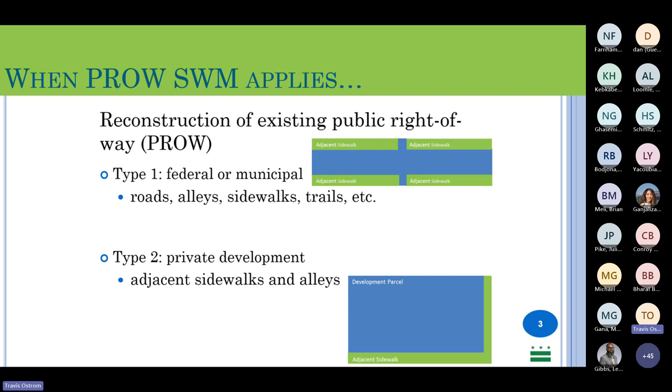And we'll get into the differences and how those are handled in depth later on in the presentation.

So there are a few cases where the public right-of-way stormwater management regulations do not apply, some exemptions to this application. One is when there is a major regulated project that does not disturb the adjacent public right-of-way. Right, so just because you're developing a private parcel, you don't always disturb the adjacent public right-of-way. Sometimes your disturbance is limited to these activities that are mentioned here. So just trenching for utility work, right? So if you're not really redeveloping the public right-of-way, you just have to put in a trench for the utilities.

Stormwater management regulations don't apply to that. Aprons, so driveway aprons are also another case, or minor disturbance, which I believe is less than 50 square feet. But there's very little disturbance happening in the public right-of-way. So these cases, you don't have to do a full stormwater management plan for the public right-of-way. It's just what you're doing on your private parcel.

And then there's the case of voluntary retrofits of the existing public right-of-way. So this is where you'll be voluntarily retrofitting the public right-of-way to achieve better stormwater management. So putting in a bioretention in the public right-of-way, putting in a permeable pavement in the public right-of-way. These types of projects, when it's voluntary, just the intention of the project is the BMP itself, then the public right-of-way maximum extent practicable process that we're talking about today doesn't apply. There are still some regulations around that, some design specifications that you have to follow, but this process that we're going to talk about in depth today doesn't apply to those voluntary projects.

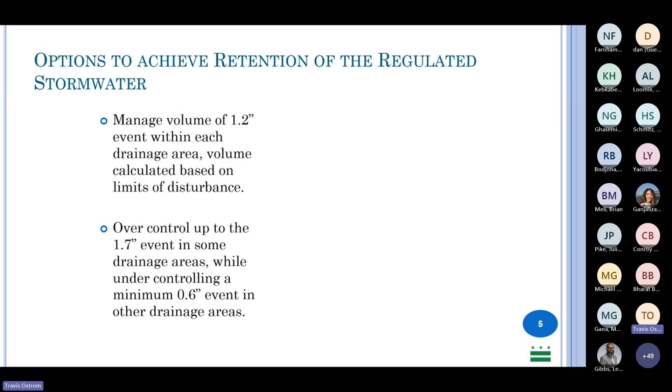You can also manage the minimum of the 0.6 inch event within each drainage area and then balance the rest through offsite retention. This is rarely used because it's not required, really, right? So you're doing the maximum extent practicable process in lieu of paying for some offsite retention volume. I don't think I've ever seen anybody do this, but it's an option. If you want to pay for those offsite retention volume credits, you absolutely can. And so this last one is really the bulk of what we see in the public right-of-way.

And it's to establish a technical basis to demonstrate that stormwater management has been met to the maximum extent practicable, or the MEP. So that's what we're talking about today, is really doing everything that you can in the public right-of-way, considering the conflicts and whatever else is going on that you have to work around, to get us close to that full volume that started with the first bullet point there.

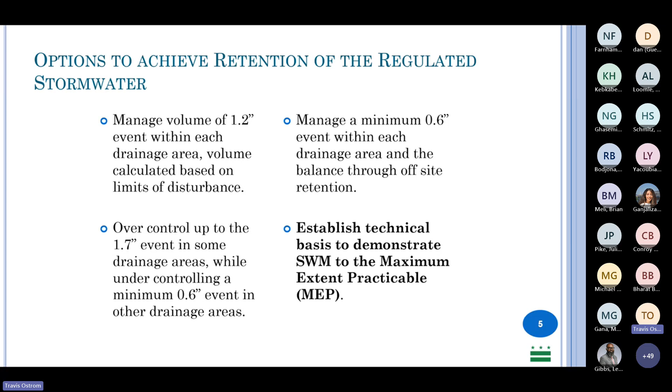And that's really kind of the most common thing. But it's important to remember that the target is always the full retention volume. So don't undersell yourself. There are opportunities to do stormwater management in the public right-of-way. Please keep that as a focus throughout this, because we're going to look at a lot of different conflicts and reasons why it's difficult to do stormwater management in the public right-of-way. But it's good to keep in mind that we are trying to keep that goal, that maximum extent, in mind.

So that said, really the maximum extent practicable, or the MEP process, is a recognition that it's technically infeasible in many cases to achieve that full regulated retention volume, right? So you go through this process and you demonstrate how you've done the stormwater management to the MEP. And as I mentioned from that third bullet point, it's excluded from the requirement to use offsite retention. So you don't actually have to. You're absolutely welcome to purchase offsite retention credits through the SRC trading program, but you're not required to.

Sorry, I lost my slide.

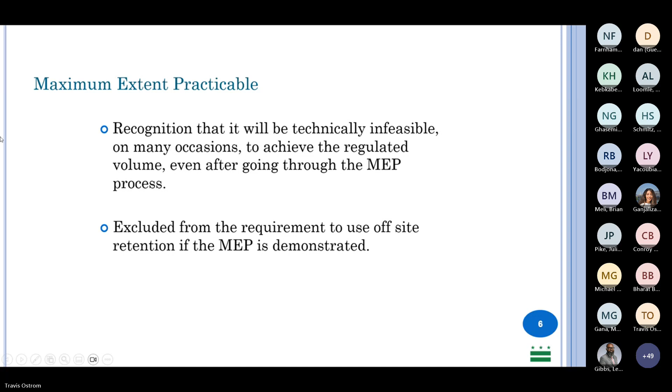So talking about some of the constraints in the public right-of-way, there are unique site constraints for each site. Each site's a little bit different, but generally we have, in many cases, some of the same conflicts. One is that there's limited space outside of the roadway, right? So the main part of the public right-of-way in most cases is the roadway itself. So working around that area, sort of between the roadway and the private parcels, restricts a bit of the opportunity for stormwater retention.

Often, especially for these type 2 projects where it's really disturbance of the public right-of-way ancillary to the primary goal of the project, which is the private parcel, you're really not going to be modifying the roadway, right? Some of those roadway reconstruction, the type 1 projects, possibly can do some more modifications to the roadway, but in general, the roadway is the roadway. So you're kind of working around that as a major constraint. And then there's the traffic loads again, so the roadway kind of takes primacy as the primary use of that space in most cases.

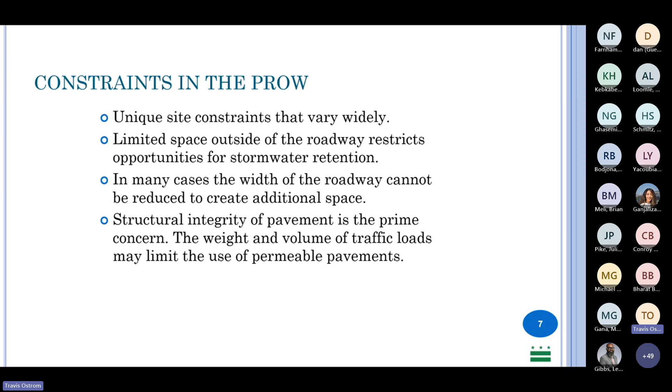So one point that I want to really emphasize here is that these regulations are driven by the Department of Energy and Environment, the DOEE standards. And so we have this Stormwater Management Guidebook, last updated in January 2020. This is available on the DOEE website. I highly recommend everyone, if you haven't, read through this and get familiar. And that other training, I think someone posted it in the chat, the link to the other trainings on YouTube for the compliance, goes over a lot more in detail on the Stormwater Management Guidebook. But that's a really good thing to remember here, is that we're talking about public right-of-way. It's sort of a specific instance of the stormwater management that's covered in the Stormwater Management Guidebook.

And we're going to go talk about the BMPs, or talk about this public right-of-way MEP process. And it ends up kind of focusing on 3 primary BMPs, not exclusively, but just because of the constraints, these end up being the 3 most common. We have permeable pavement opportunities. Bioretention is a really big one, because you can fit a bioretention in a relatively small space to get a relatively large treatment volume or drainage area. It kind of gives you a lot of bang for your buck when you're talking about this constrained real estate of the public right-of-way. And then tree planting and preservation, this is a huge opportunity. DC has some very ambitious goals on preserving and increasing the canopy cover of trees throughout the city. So it's really important to recognize that BMP as one that can be taken advantage of in this MEP process.

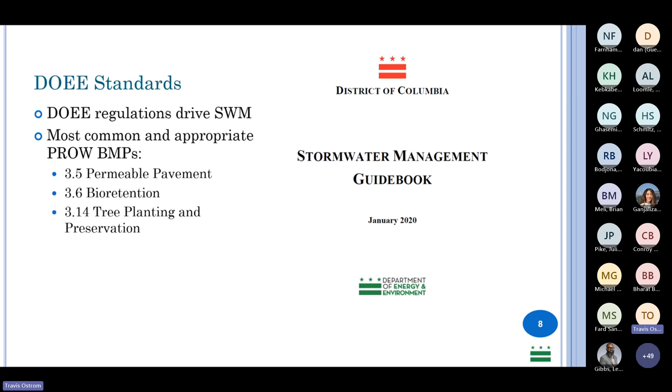So you've got that bioretention function there, and then you also have the tree. The tree is in the bioretention area, so it can be an additional BMP on top of the bioretention. When you're doing your calculations for retention, you get credit for the bioretention itself, and you get credit for a tree that you're planting. The tree has all sorts of functions - it's got the canopy, the interception of stormwater, as well as the co-benefits you get from both bioretention and trees in terms of the urban environment, ecological benefits, heat island, and the other benefits of putting these plants in these areas.

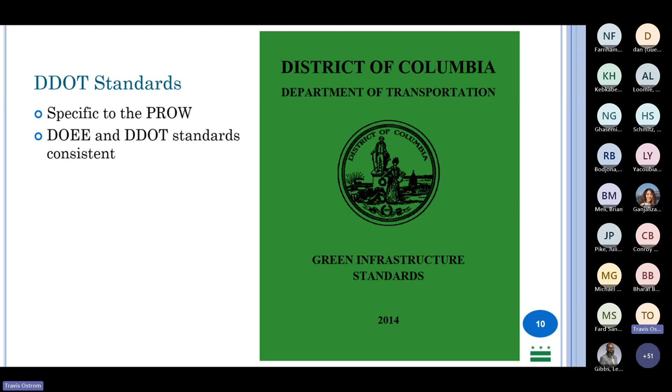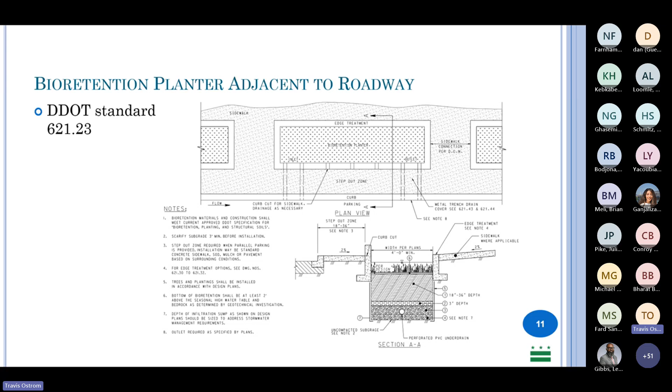Going into this public right-of-way maximum extent practicable philosophy and policy, the basic principles start from maximizing BMP placement. We want to use as much of the space available to put BMPs in as possible.

We also want to maximize the BMP sizing, where it makes sense, getting as much retention of that drainage area as possible. I don't mean putting in a gigantic bioretention that only has a tiny amount of area draining to it, that's not useful and effective. I mean maximizing the BMP sizing relative to its drainage area, getting as much stormwater treatment as you can.

Minimizing impervious widths is an important point that's often overlooked. We want to not just put in BMPs, but also see what we can do to minimize how much imperviousness is in the public right-of-way. Are there areas where you can remove existing pavement, maybe extend the tree rootable area that's there? Are there other places where, instead of an impermeable surface, you can change it to a permeable surface? And then managing the commingled stormwater runoff.

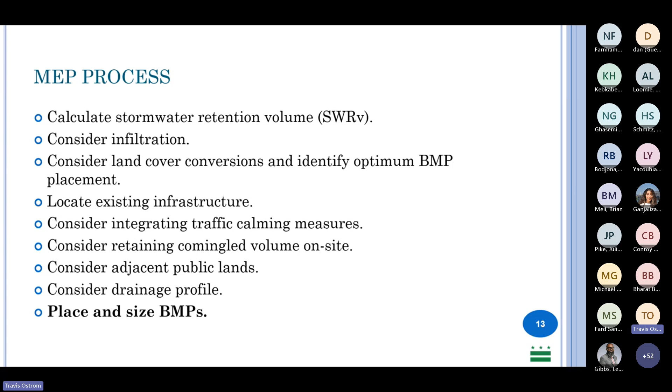So the MEP process is a process for design, but it's also a process that you have to demonstrate. You have to demonstrate to the plan reviewer that you've gone through this process and document the steps in the process that you've done.

You want to demonstrate that you've evaluated the infiltration capacity, looking at the water table elevations for any opportunities - if you don't have water table issues, or if you do have restrictions based on high water table. Looking at the infiltration feasibility.

You have to do geotech testing, looking at whether there's a possibility to amend soils, whether under-drains may be needed, and looking at any soil contamination that may be present in the area. These are just things you need to look into when looking at the infiltration potential or limitation.

Looking at existing infrastructure - is there potential conflict with anything in the subsurface? In the public right-of-way especially, there's a lot of infrastructure in the subsurface. You have to identify the location and elevation of the existing storm drainage infrastructure and really all the utility infrastructure. If you're going to demonstrate that you've done the maximum extent practicable, you have to show where these utility conflicts are and that they actually are a conflict.

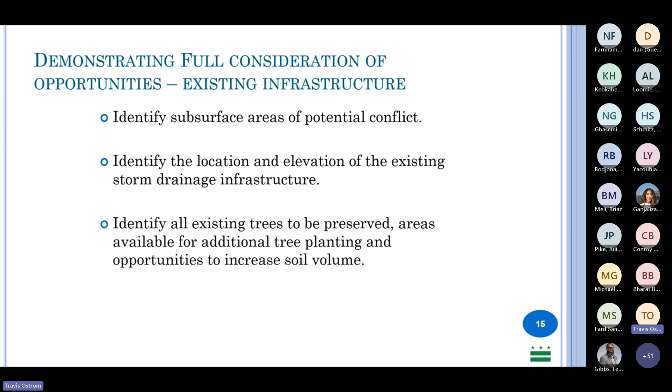So when you get into sizing the BMPs and placing the BMPs, you want to delineate the full drainage area to the BMP locations - not just the BMPs, not just the drainage area that's within your LOD, within your limits of disturbance. You want to look at the full drainage profile of all of the roadway runoff.

Maybe there's runoff coming from the private parcel that's getting to these BMPs, so you want to look at and delineate that full drainage area. Then follow the sizing and design methodology for whatever BMP it is, using the appropriate chapter of the stormwater management guidebook from DOEE and from DDOT. There are specific design and sizing methodologies in those documents that are very helpful.

And then you provide that to the plan review - provide the calculated sizing criteria for that BMP. And if you can't design the BMP exactly based on those criteria, there can be reasonable modifications to it given whatever constraints are there.

We want to right-size the BMP rather than oversizing the BMP. As I mentioned, having a gigantic bioretention that's not receiving a lot of runoff isn't really that helpful. It would be preferable to have a right-sized bioretention and some additional green space rather than having an oversized bioretention that's not going to be doing much because it's not receiving enough drainage area.

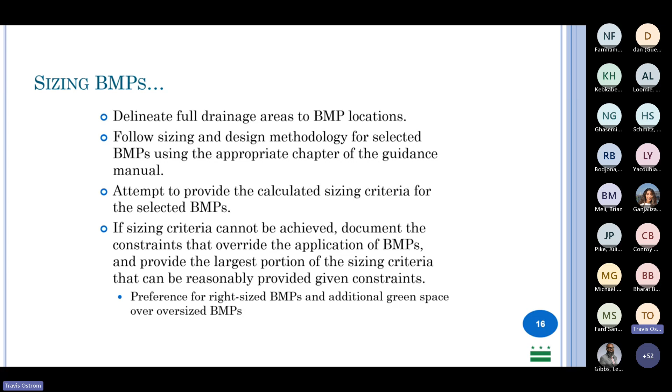So going into some of these conflicts in a little bit more detail, one of the most common conflicts we see is low infiltration rate.

As I mentioned, we're working in the public right-of-way where oftentimes the historical use of that area has been compacted roadway or sidewalk. You may not have the available spatial layout that you need for connecting to a storm sewer. Oftentimes you do, but sometimes you can't.

The topography, right? Oftentimes where you're working, where you could put in a BMP is not where the water is going, or where the water is going to go based on your design. So you can try to modify the design to some extent when you're reworking a whole roadway, but oftentimes the topography is sort of decided for you when you're working in the public right-of-way. You don't have, in many cases, the ability to modify that in the way you do if you're doing a full private parcel development or if you're doing a full roadway reconstruction.

And then the existing trees, as I mentioned, is another common physical conflict.

Beyond the actual physical conflicts, there are a number of other uses for the public right-of-way that we've alluded to throughout this, that there are all sorts of things going on in the public right-of-way, that it's not just a place to manage stormwater and get cars through. There are a lot of other requirements that we have to think about, right?

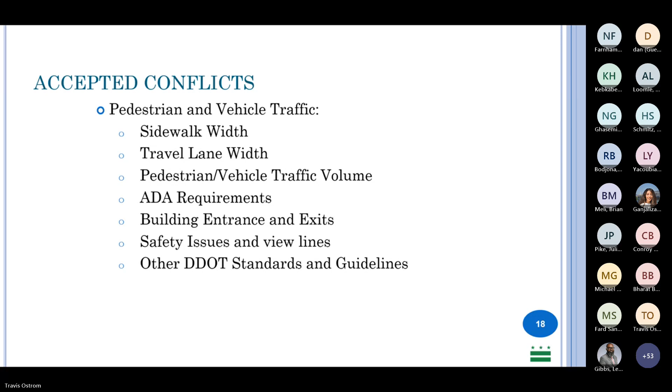Looking into just one example of the detail here for utilities. Utilities are one of the very common accepted conflicts, right? And when I say accepted, it's if you're demonstrating in this MEP process that you've considered, you're showing where on the plans, right? This is the sidewalk width that we have to maintain. These are where our utilities are placed, and this is the space, the spacing between where the BMP could go and where the utility is.

As I mentioned, just because there's a utility there doesn't mean you can't do a bioretention or another BMP. There are details in the DC Water Green Infrastructure Utility Protection Guidelines and other relevant agency standards that will determine whether you can put in BMP around those utilities. So it's just a thing to consider. You have to look into it and demonstrate where these potential conflicts are. But if there are conflicts, it's a justification for not putting the BMP in that location.

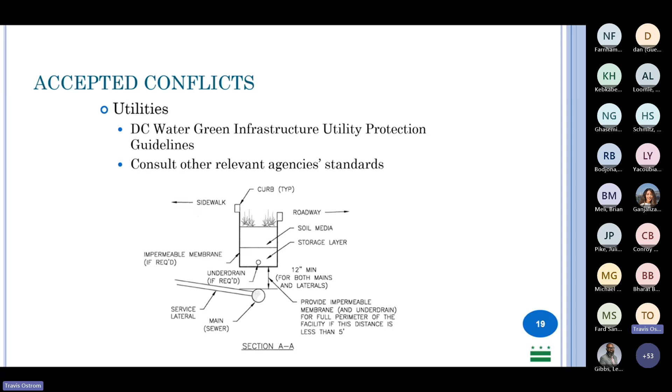So there's just more kind of details on the setbacks. I won't go into too much detail on that, but just to point out that the setbacks are important to consider.

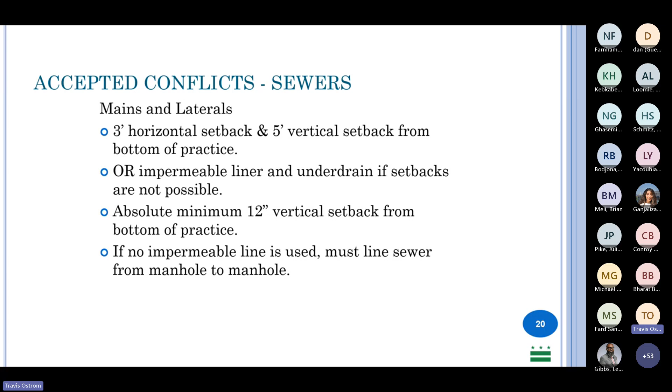So I've talked a bit more about the type 2 MEP projects so far. We're going to kind of go into a little bit more detail on that specifically. And it's a pretty straightforward approach, right? So you're looking at if the development meets the SWRv in the public right of way. So that stormwater retention volume, that kind of target, you're looking, did you hit the target? Did you put in enough

stormwater management features in the public right of way, right? Whether that be land conversion or a stormwater BMP to meet that full stormwater retention volume. And if not, has the designer maximized stormwater retention and provided a narrative, provided that documentation, that demonstration that the MEP has been followed, right?

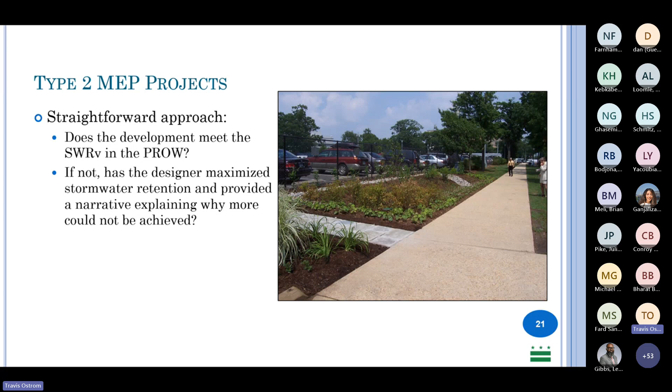That's a really key part of this, is that oftentimes, I know there are a lot of things when you're designing that you go through and there are constraints that you consider. You have to demonstrate those to the plan reviewer, and that'll help you avoid some of the back and forth of the plan reviewer asking, oh, did you consider this? And maybe you did, but you didn't demonstrate it. So keeping that in mind when you're putting together your designs to make sure that you're communicating this process to the plan reviewer.

So some of the common issues we see in these type 2 projects, the development parcel and adjacent public right of way, is that we see plans that just don't consider the public right of way at all. There's disturbance, but no attempt has been made to show any sort of stormwater management in the public right of way.

Another issue is unclear delineation of the public right-of-way limits of disturbance. Oftentimes we'll see plans where the on-site private parcel delineation is very clear, but the work going on in the public right-of-way is not clearly shown, so it's difficult to determine what area of disturbance we're talking about.

A narrative is very essential, explaining the MEP efforts. Weak justification is something we see often, so we really want plans and designs to show this process. The narrative should explain the efforts made to put in stormwater management to the maximum extent practicable, and you have to justify it, considering all the elements discussed.

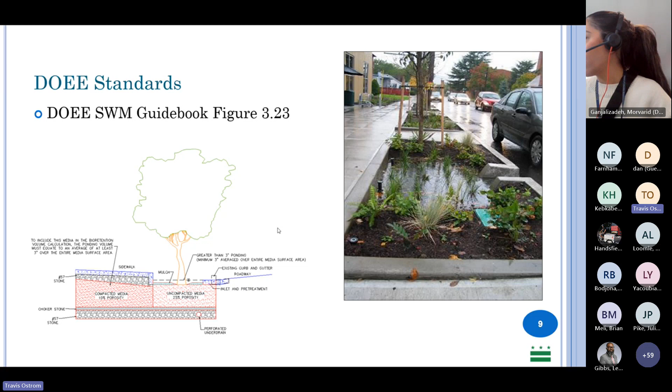Sorry, before that, Will also asked: in general, if you're replacing a portion of asphalt with sidewalk, like curb bump outs or bus platforms, I think these are minor disturbance. Can you confirm?

So the minor disturbance would really relate to how much area. Sidewalk, that's disturbance, it would be a matter of how much you're disturbing. So those, I guess I had to see, let's see the exemptions slide.

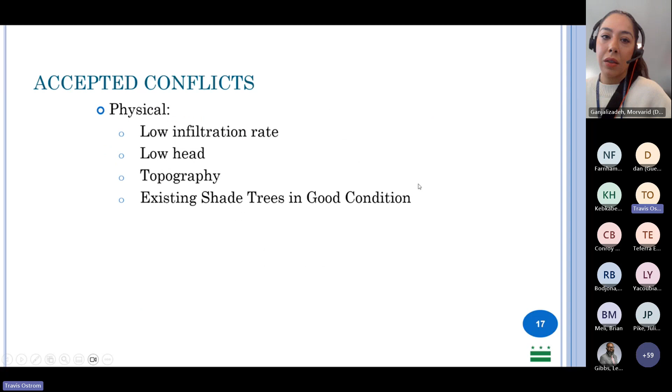Travis, I'll also jump in. This is Julie Pike, yeah good thing. Hello, I'm from DDOT Stormwater as well. It would not automatically just be considered minor disturbance, and we go over this a little bit more in the presentation that Morvarid has.

It's a little bit more specific in terms of what we're looking for. So if your disturbance for a curb bump out or bus platform or anything else still triggers that 5,000 square feet, you would still have to look around and see what you could incorporate. They're just not automatically exempt.

There is some construction with these bump outs and bus platforms in which a standard construction practice would not mean removing the GAB at the bottom, or removing existing pavement layers, and those would not be considered disturbance. But I don't want anyone to think we're encouraging you to leave substandard base in place just to avoid doing MEP. This would be based on actual standard constructability and construction practices, not an effort to skirt around doing proper stormwater management.

Thank you, Julie. That's a really important point to remember: throughout the DOEE guidebook, there are all sorts of exemptions and special situations, and none of those are really intended to say you don't have to do any stormwater management in general. It's really trying to recognize specific cases.

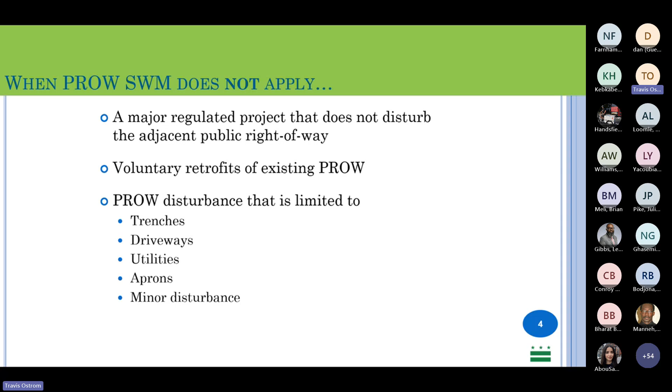All right, so let me continue on with the— Hey Travis, yeah go ahead. There was just one more item about trails.

We referred to section 2.13 for trails, so it can fall under the practicable process. I don't know if you want to dive into that, or if they are natural land cover—I think that's a big issue with trails. So, the trails is sort of a special case.

So that's another one of those situations where it's a kind of special situation. We're recognizing that there's possibly a trail that would have greater than the amount of disturbance that would trigger stormwater management requirements, but not in such a way that it makes sense to put in BMPs. And so 2.13.2 talks about the practicability process. That's a process where we really get into some of these special cases, like turf fields at schools or parks, trails, affordable housing, where we're sort of recognizing the realities of those situations.

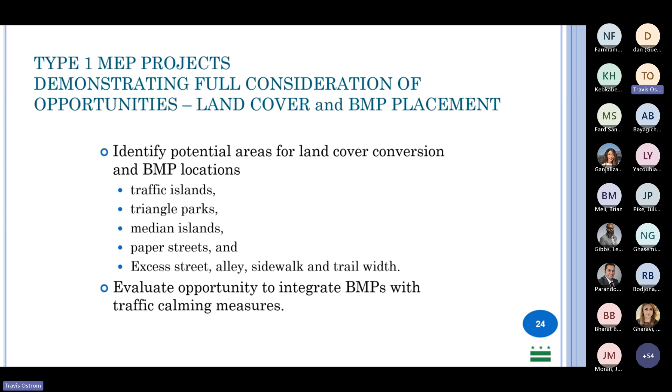And you want to really look at your project on the grand scale of it - identifying potential areas for land conversion and BMP location in and around the roadway. So traffic islands, triangle parks, median islands, paper streets, alleys, sidewalks - looking at these sort of opportunities to integrate BMPs with the other infrastructure and spaces available in the roadway. So maybe with traffic calming measures, in some of these median islands and that sort of thing, where you can use some of the space available for stormwater management.

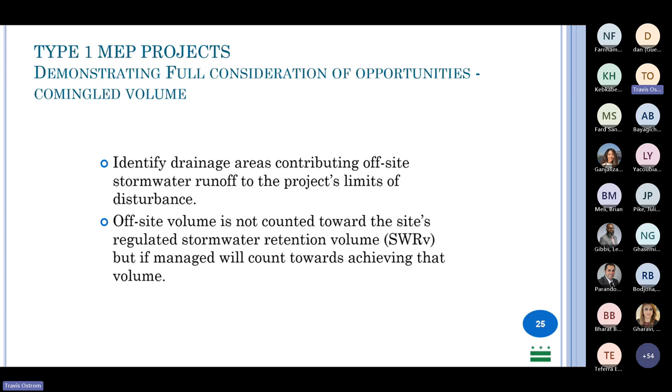And what you want to do is really demonstrate that you're giving full consideration to all these opportunities. You're focusing on commingling this stormwater runoff from the roadway and taking into account the full drainage areas. So just because you have certain limits of disturbance, there may be additional runoff coming from areas outside of that limits of disturbance - consider that runoff as potential to manage. It doesn't count towards that actual retention volume in the calculation, but if it is managed, it doesn't count towards the requirement, I should say. So when you're calculating the requirement, that target SWRv you're trying to achieve, that volume coming into your limits of disturbance doesn't count towards that. But if you manage it, it counts towards your credit - it counts towards your efforts to reach that SWRv. Hopefully I got that across.

So what you really want to do in these cases is look for opportunities for best management practices and land conversion. You want to try to keep the imperviousness as minimal as possible and select areas for the optimum opportunities. Where would you want to put the BMPs? Where would you want some permeable surfaces, landscaped areas, turf that's going to achieve some infiltration? Then select the most appropriate BMP types for these areas using the guidance manuals available.

If you can alter the drainage profile - this is one thing you might feel a bit constrained by the way the roadway is laid out - it gets at integrating stormwater management considerations into the project, so it's not always an afterthought. It's something that can be worked into the project design from the beginning, and that may open up opportunities by changing that drainage profile to allow for more runoff capture by the BMPs.

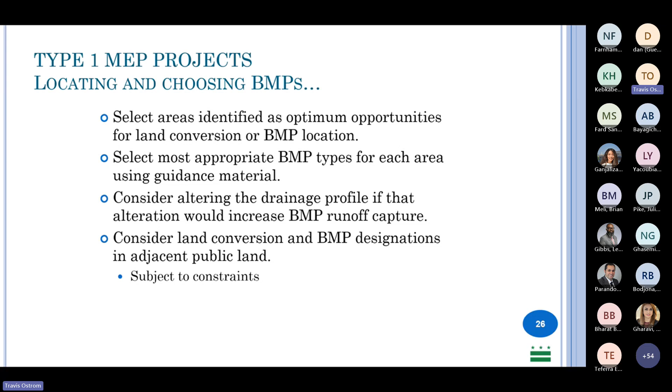And again, with land conversion - if you're considering stormwater management as an integral part of your project design, you can look at some of those opportunities. Maybe it's on adjacent public land, maybe it's not. As I mentioned, with adjacent public lands there are some additional constraints that may come along with that. But there's often opportunities for land conversion and BMP designations that you can figure out if you're really thinking of it as an integral part of your project.

So I'm going to walk through an example. The process here is a little bit different than the narrative documentation process we went over for the MEP Type 2. The Type 1 MEP has defined stages - you're going to be submitting your plans at the 30%, 65%, 90%, and 100% design stages. So we really have to stress that we want you to follow that process.

If you come with a 90% design, and at that point you're starting to evaluate the stormwater management opportunities, it's going to make the whole process a lot more difficult. You really want to start at the 30%, in your conceptual design. You really want to have stormwater management integrated into your design thinking. That's why we ask for the 30% submittal for the stormwater management plan - so you can have it integrated in and start thinking about these things.

And there are specific steps to it, so we'll go through a little example here. The first step: you're going to look at your drainage areas and your regulated volumes. What's your LOD? How much of the stormwater retention volume is calculated based off that LOD? And then delineate the drainage areas within that LOD and outside the LOD - where is the adjacent area flowing to as well?

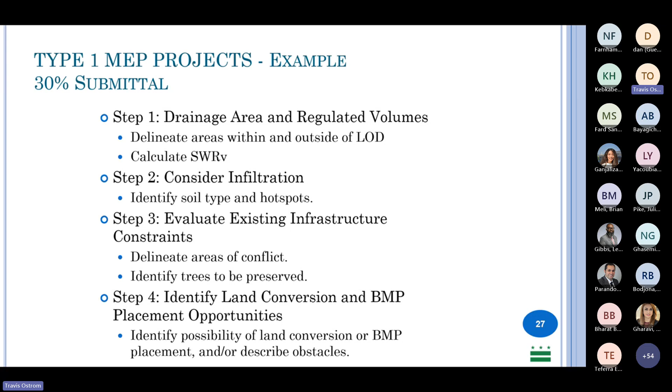So looking at and delineating these areas of potential conflict - utilities, existing street trees, that sort of thing. Step 4: identifying the land conversion and BMP placement opportunities. You can start thinking about where, in the scope of what you've got at the 30% stage, you can maybe do some land conversion, or potentially put some BMP without having looked into detail of all the other items you'll get into in later stages. But where could there be some potential? You want to start thinking about that at this stage and showing it.

All right, so there is the limits of disturbance. It's mostly the sidewalk area there. As I mentioned, the mill and overlay is not part of the regulated stormwater volume.

But the blue area here is all the drainage area. So as I mentioned, you have this drainage area that's within the LOD, that orange, and then you have the drainage area that's also flowing to it from the adjacent street. Some a little bit on the bottom here, some from just outside onto what might be the private parcel there—oh no, sorry, it's still in the right of way. But it might be flowing from another sidewalk area that's outside of the LOD.

As they've shown in this example, this delineation of the drainage area is not considering the private areas that may be flowing. That's not always the case. Maybe this is commercial buildings right up to the right of way and there's no runoff coming from them. But in many cases, there will be runoff coming from these private parcels, and that should be included in the blue drainage area if that's the case. So it's really dictated by the actual site conditions.

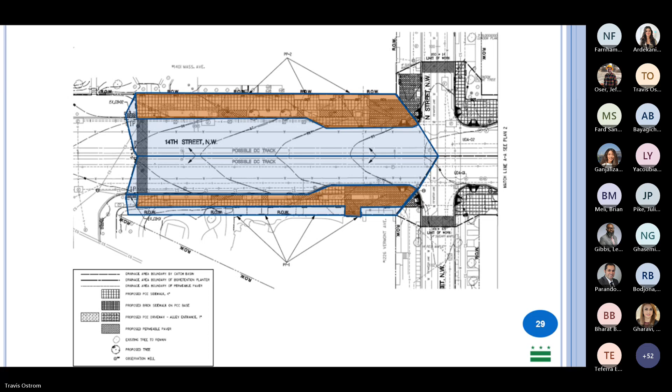And then also in the right of way, the existing—so this is the next step after you've looked at your LOD, calculated the stormwater retention volume based on that, delineated your drainage areas, and then you show what the existing constraints are. So these are some existing street trees in the area, some utilities in the area, and you're showing this on your 30% plan submittal.

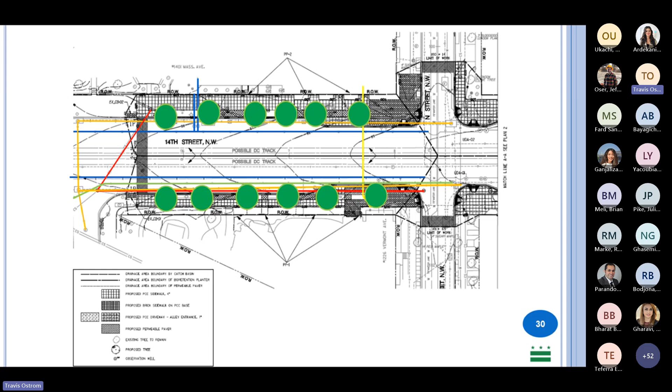Head back over to the presentation here. So then you'll submit that, and the plan reviewers will evaluate it and give you comments back to address before you move on to the 65% submittal. It's really important, don't overlook this 30% phase—even though it seems like there's not as much detail on it, it's a really important part of the process to really get stormwater management as an integral part of the design thinking.

So then if you address those comments, you move on to the 65% submittal phase.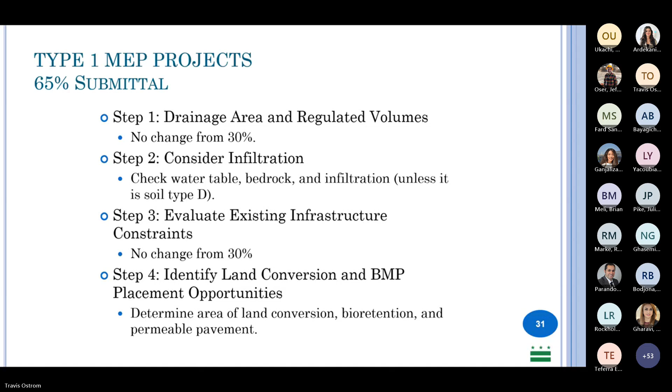Then in step 5, you'll actually start sizing the best management practices, looking at their contributing drainage areas, calculating how much retention you're getting based on the BMP sizing and the storage volume you've sized it for, and then identifying where you're going to put some proposed trees—where can you fit some new trees? That's a new step in the 65% stage.

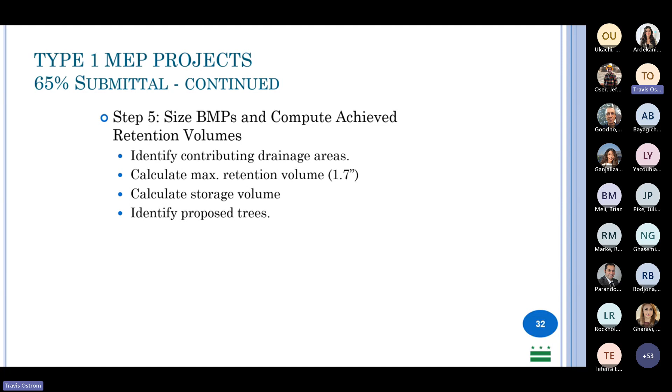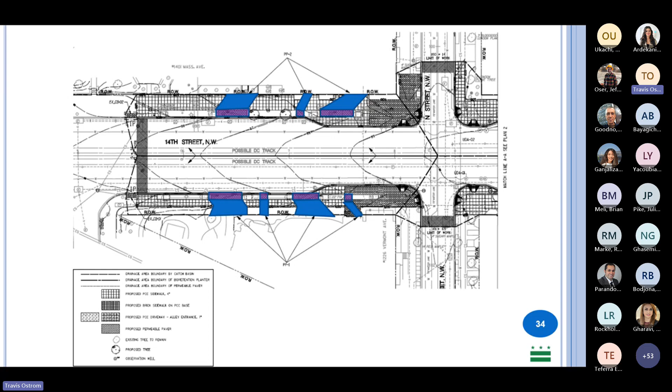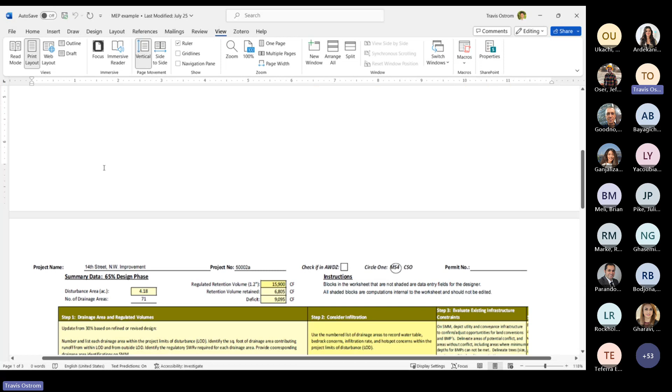Let me go over to the spreadsheet again. This was the 30% design phase, so I'm going to scroll you down here to the 65% design phase. I'm going to give you an example spreadsheet in the activity later, so you'll be able to poke around at the spreadsheet and understand it more in depth. It's a little bit hard, I realize, with these screenshots.

We're looking here—this is actually the left side of the screenshot, because at the 65% design phase, the spreadsheet gets a little bit more detailed. There are more steps, more details in each step. You can see in step 1, drainage area and regulated volumes, there's nothing new—these areas may have changed based on your design, but there's nothing new to add in there. You just have to update it based on your design.

Step 2, the infiltration, there's new information here. Before, we were just looking at whether the hydrologic soil group is amenable to infiltration, and whether there's a hotspot concern.

Now we need to put in, what is the water table? Is it within the limits specified in the guidebook, which is that there needs to be a 2-foot space between the bottom of a bioretention or other BMP to the water table. Is there bedrock elevation? Okay, same thing there.

What is the actual measured infiltration rate? This is based on the geotechnical testing that you will have conducted at this point, and you need to put in the actual measured infiltration rate at this stage. This is one thing we see oftentimes at this stage, that the geotechnical testing hasn't been done, or the infiltration rate shown here is sometimes just a filler value. So what really the point of having this in here is that you want to be demonstrating this, testing it and seeing what that infiltration rate actually is.

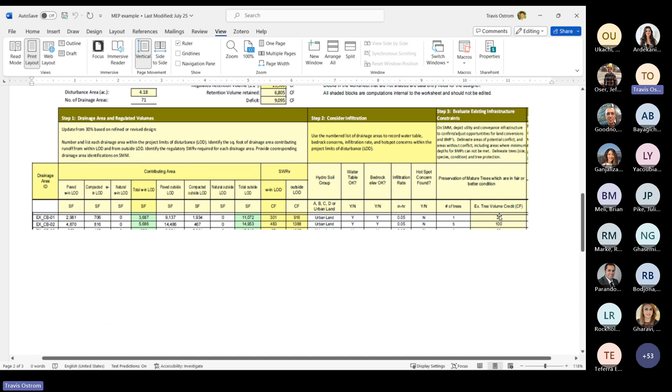So if we come down here, you can see I had 139 cubic feet of runoff volume that I can treat up to, because that's what's coming to the permeable pavement based on the drainage area, plus the 20 cubic feet from the trees I'm preserving gets me a retention value of 159 cubic feet. And then same thing down here, we have this 152 cubic feet ceiling for the available runoff, plus the 100 cubic feet of the trees gets you this stormwater retention value of 252 cubic feet.

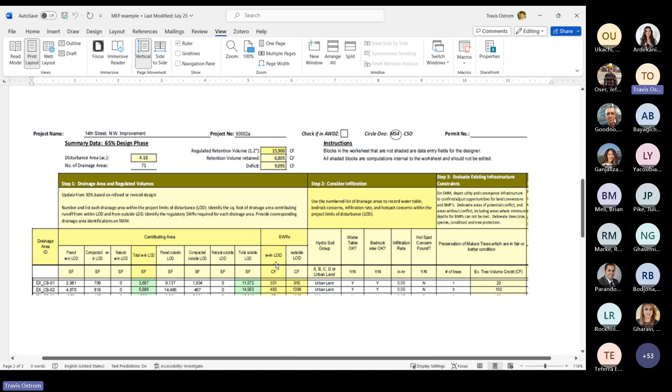So you can see in both of these cases, there's more storage available in the BMP than there is runoff going to it - not by that much, but these are pretty well-sized BMPs. And then the final thing on this sheet is they're comparing this overage or deficit, comparing to that SWRv that was calculated. So I'm going to scroll back up on the far left side - you had this SWRv calculated in the LOD. So this is the target, this is what we're trying to get to.

The 301, for example, here. And then 159 is what we actually retained. So there's a difference there, shown in red, that's the deficit.

So we're showing we're not achieving the full stormwater retention volume required for that drainage area, but through this process, we're demonstrating the maximum extent practicable. We're showing the constraints, the BMPs' locations, the sizing, and the drainage areas available to get to those locations. This gives us a clear picture of how well we did, how close we got to that maximum extent, after accounting for the practical part of it.

So let me take you back to the presentation here, just going on to the 90% stage. This is going to be, in many cases, not too different from the 65%. The bulk of the stormwater management design should be in place at the 65%, and that's quite often the stage where you'll get the most comments or back and forth in the plan review process. So when you submit your 65% design, you'll respond to those comments before proceeding to the 90% phase.

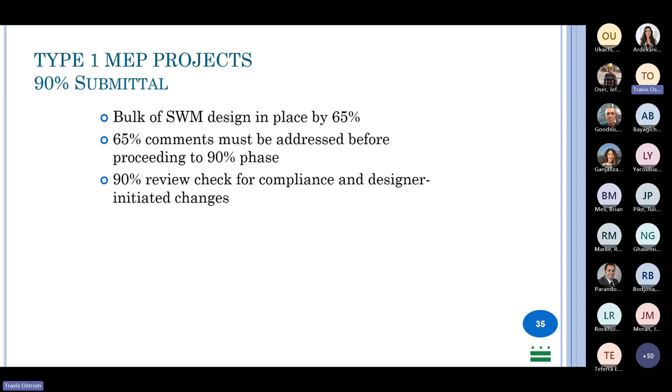Let me see if I have a 90% example. I don't. Yeah, so the spreadsheet is basically the same as well.

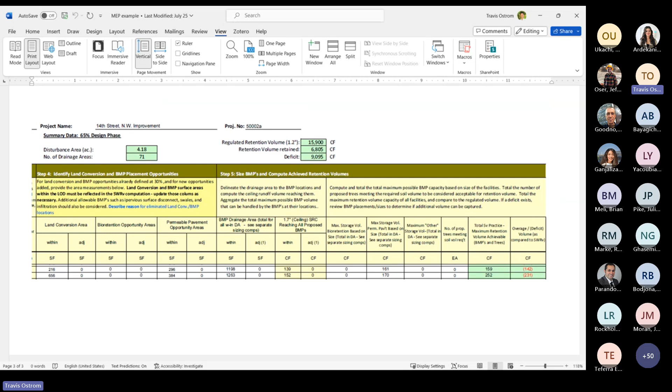There we go. Okay, so the last thing I'm going to talk about before we have a little break, before we get into our example activity, is some of the common things we see.

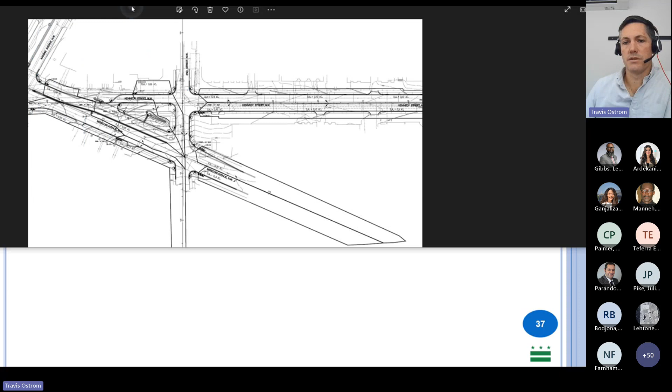So we have this example plan. One of the first files you'll see is just a layout of this street, a JPEG file, and then you have a PDF of the same area, a landscape materials plan, two different sheets of the same layout. You can see there's a match line, showing Missouri Avenue intersecting with Kennedy Street and 2nd Street, this kind of triangle island here. The match line shows one additional sheet at LS10, extending on down to Kennedy Street, with some of the proposed improvements along Kennedy Street.

So that's kind of the layout files that we're providing for you. The JPEG shows kind of the zoomed out version of what those two sheets on the PDF show.

Everyone just take a moment to look through, make sure you have the files, and get familiar with this site. You can see this Missouri Avenue, Kennedy Street, 2nd Street kind of triangle island that's being created, and this streetscape redevelopment. Right, so that's what this project is, a streetscape redevelopment here at this three-way intersection.

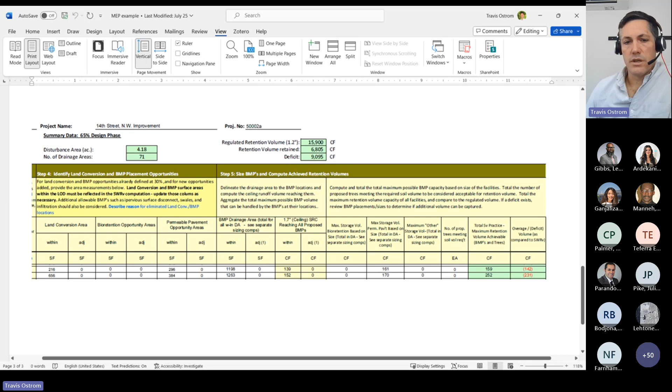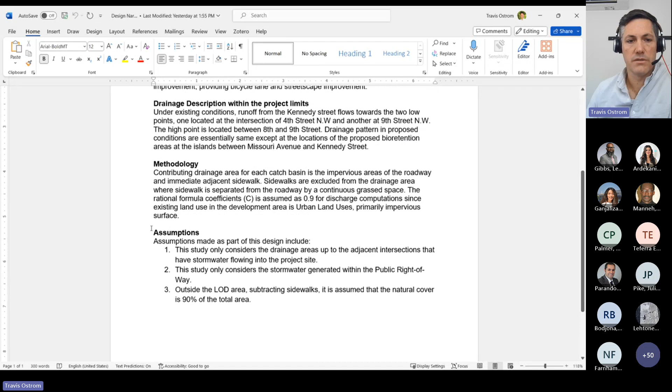And then there's a design narrative also provided, a Word document that has the design narrative. Everybody please read through that design narrative. You can see they've made some assumptions, and they give a description of the methodology, the drainage description, project description, that sort of thing.

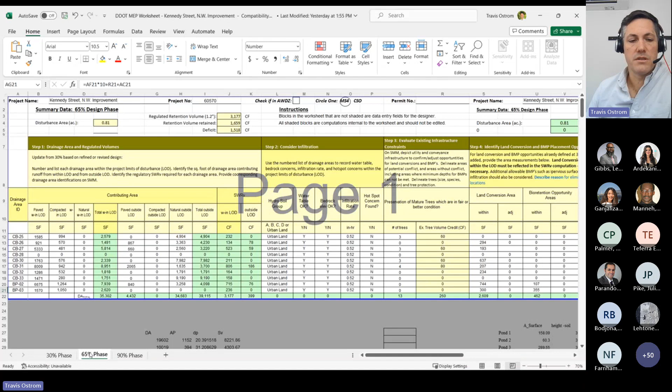And then the final file, the fourth file that's shared here, is the DDOT MEP worksheet. Just look at the 65% phase, don't worry about the 30 or the 90% phase. We're just going to look at this as if we were looking at a 65% plan submittal for this project. You can see here they've identified the drainage areas and put in some of the information specific to this Kennedy Street Northwest improvement.

So what we're going to do in this exercise, hopefully everybody's back. Does anybody have any issues? Looks like everybody got their access to the files resolved.

So what we want to do here is go through these files. Take some time here. We'll have as much time as we need, but let's say we'll go through this in about 15 minutes or so. We'll give you time to review the design narrative, read through it, see what this design is all about, the layout files, and then the MEP worksheet.

Go through this as if you were a plan reviewer or maybe a senior engineer reviewing this project from a junior engineer's design, and try to think with all the things that we've talked about today, all the possible points of error, all the BMP considerations that we discussed. Look at this with a critical eye to see what comments a plan reviewer might point out, and what you might receive back from the DOEE or the DDOT plan reviewer when you've submitted this.

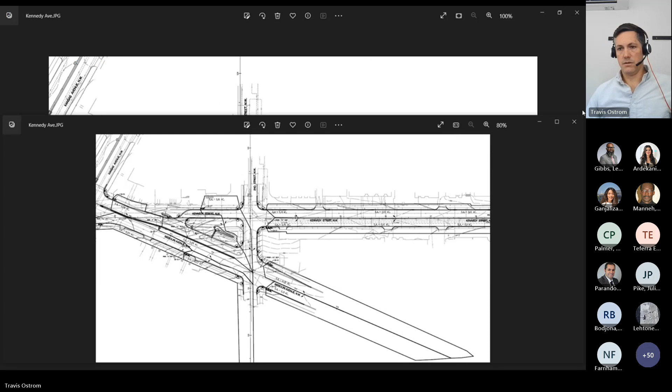Go ahead and everyone take the time to read this and take a look at the layouts. I'll stop sharing my screen. Maybe I'll go back to the presentation. But everybody go ahead and read through and start formulating your comments. And as you come up with comments, throw them in the chat, and we'll go through and discuss what everybody finds.

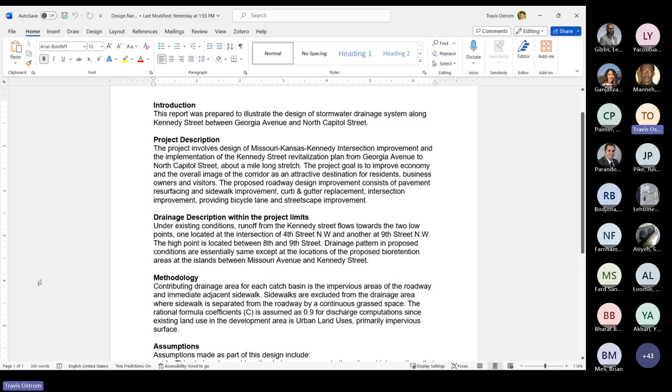The assumptions they have down here: one is that the study only considers drainage areas up to the adjacent intersections that have stormwater flowing into the project site. It only considers stormwater generated within the public right-of-way. Outside the LOD area,. Subtracting sidewalks, it is assumed that the natural cover is 90% of the total area. So does anybody see anything in this design narrative that jumps out to them that maybe needs to be corrected?

So looking at assumption number 1, they're only considering drainage areas up to the adjacent intersection that have stormwater flowing into the project site. That's not an assumption we want to make, right? There are intersections within the project LOD, but they should have the drainage areas mapped and include stormwater calculations.

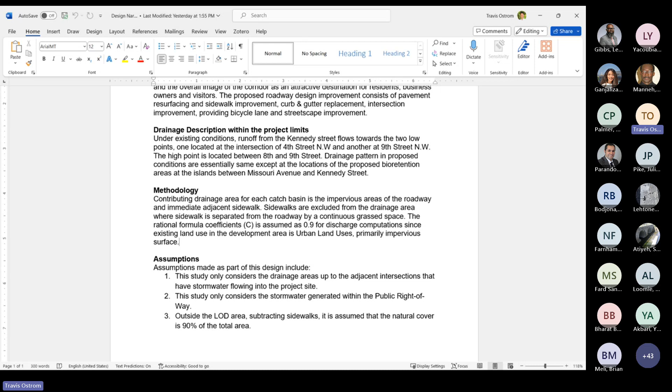Yes, go ahead, Julie. I'm going to slightly alter that - flexible porous pavement, that rubber pavement, really should only be used to support trees, primarily existing trees. But they could still use a permeable pavement, like a permeable brick paver that would match the rest of the sidewalk but would be permeable. So we're going to look for that porous rubber flexible pavement in very specific applications, versus a permeable pavement that might be more appropriate for all those new tree plantings in the tree strip.

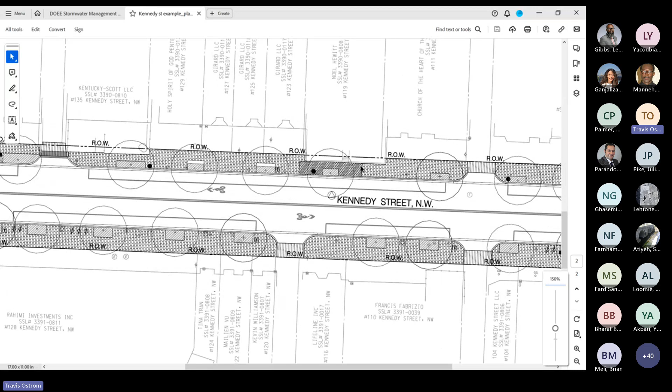I'd found that there's that one spot where they have the flexible porous pavement around this one tree here. Thank you, Ashley, for contributing that.

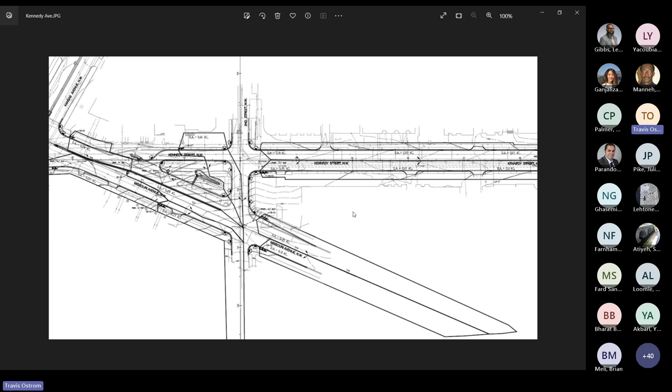Let's look at the JPEG here. So we're looking at the drainage plan on this one. I'll zoom in a little bit so we can see.

You can see they've delineated these drainage areas, and they've put drainage area equals the area, and they've got the catch basin labeled. But there's some other information we'd like to have on this. Where is the right of way? They talked about the drainage stopping at the right of way line, but we need to see on the plan somewhere where that right of way line is. Where is the LOD? We need to be able to see those in relation to the drainage delineation, and some of this might be done on different sheets, but these are important things to think about here.

What type of land cover are we looking at? What part of this is impervious and what part of this is compacted cover?

There's also a drainage area missing here. So this bioretention that's proposed here has a curb cut. There's some drainage area that's going to be going to it, but it's not delineated and labeled on here. And then labels as well, right? So labeling these drainage areas, labeling the bioretention itself, the BMP that's proposed.

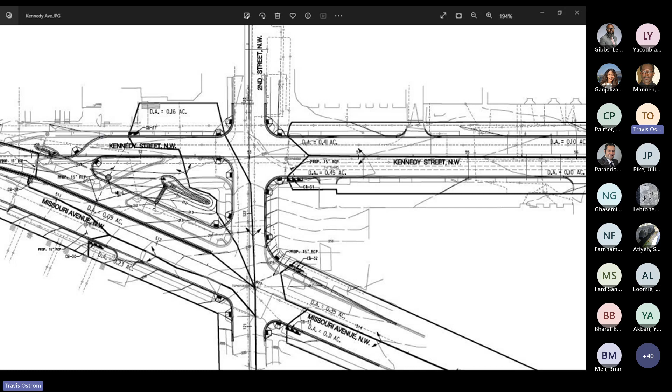Let's take a look over at the plans again and see, again, labels, right? So the labeling of the drainage areas, the catch basins, the bioretention, identifying the trees and species, right?

So there's an existing tree to remain. Somewhere on the plans, may not be on the same plan because this is the materials plan, but you may have somewhere on the plan you'll need to say what type of tree this is.

You're also, when you're proposing a tree, need to think about the rootable soil volume. So for these proposed trees, you have to show somewhere that you're providing sufficient rootable soil volume for that tree, whether it be through the actual turf or landscaped areas, or whether you're supplementing it with that structural soil. So you'll have to have some plan demonstrating that you have sufficient soil volume available to the trees that you're proposing.

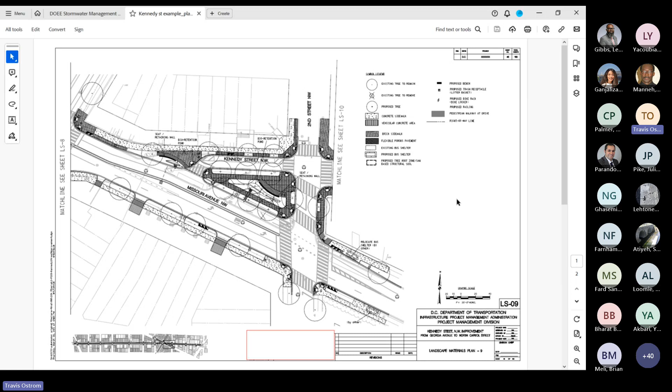And then another thing that we just mentioned was, are there opportunities for more permeable pavement? So there were multiple areas in here where this brick paver could be replaced by some permeable brick pavement.

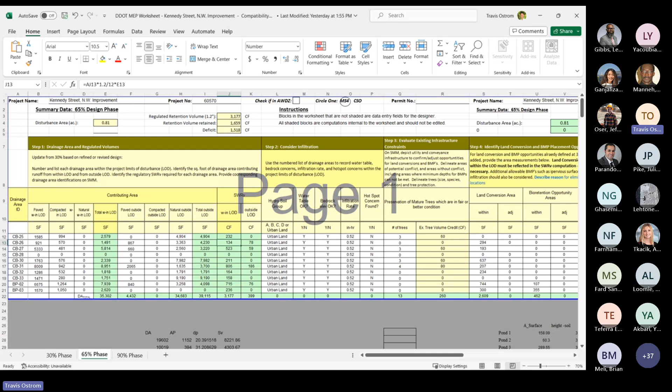Water quality catch basins - are they considered in the spreadsheet? They're not in the spreadsheet explicitly. You would have the drainage area delineated, but there's not a place to input them here. You would show that on your plans.

Next question: you focused mostly on stormwater quantity, but how is quality addressed? Is on-site treatment always required, and do you have to find an equivalent total phosphorus load for each project? That's a good question about quantity and quality.

The approach in DC is retention based. We use the idea that if you're retaining stormwater in a BMP, the quantity and quality are addressed. So you get the stormwater into a permeable pavement, into a bioretention - you don't have to do a calculation on the phosphorus load or anything like that. You just calculate the volume being treated and managed by that, and that handles the quantity as a proxy for quality, if that's clear.

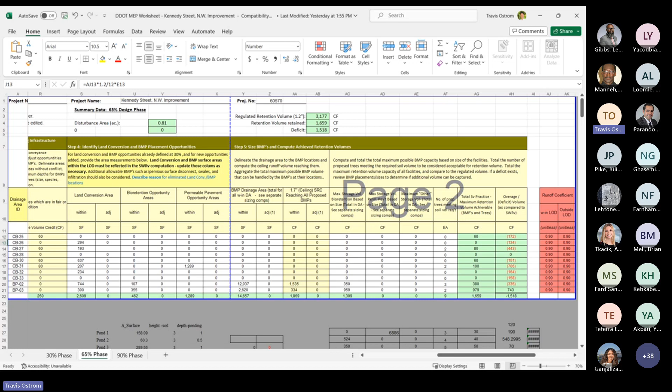Let me pause here on the questions. I want to make sure Morvarid has time to go over her slides, and some of these questions may actually be answered in her section. So I'll hand it off.

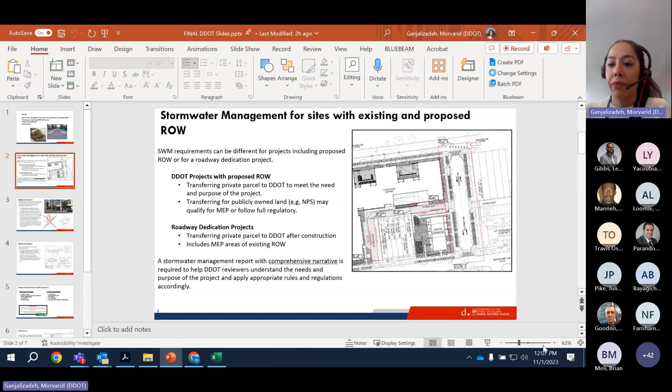Can you just show the presentation so we can see the slide full screen? Oh sorry. Oops, nope, one second. Escape. Is that better? One second. Is that better? Sorry about that, I guess this is better now.

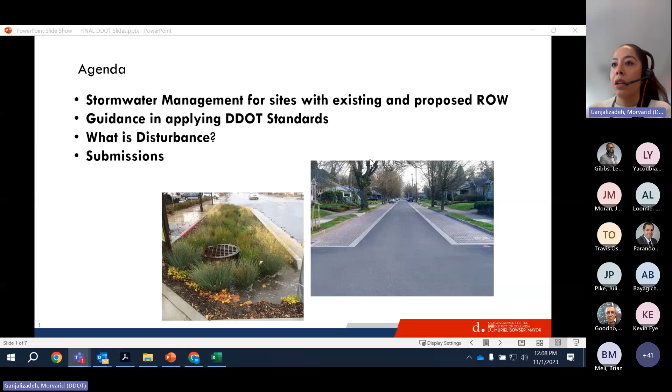Okay, so I'm going to go over first DDOT projects with proposed right-of-way, and then roadway dedication projects.

DDOT projects - sometimes we are doing capital improvement projects as part of DDOT, and the purpose and need of the project requires a parcel to be transferred to DDOT to meet that purpose. As an example, South Cap is one of the DDOT projects where we needed to transfer some parcels to DDOT to provide that oval you can see now in Southeast DC.

So when we are transferring a parcel to DDOT, this is a type of project where you are required to meet full regulations instead of just MEP.

But there's another type of project where we're transferring publicly owned land, like NPS land, to DDOT or to DC. That can go under MEP or full regulations - it depends on the nature of the project. If you're transferring publicly owned NPS land that is already a road to DDOT, that can fall under MEP. If it's just a parcel or grass owned by NPS being transferred to DDOT, that can fall under full regulations. So it depends on the nature of the project, but when you usually transfer a parcel to DDOT, it goes under full regulations.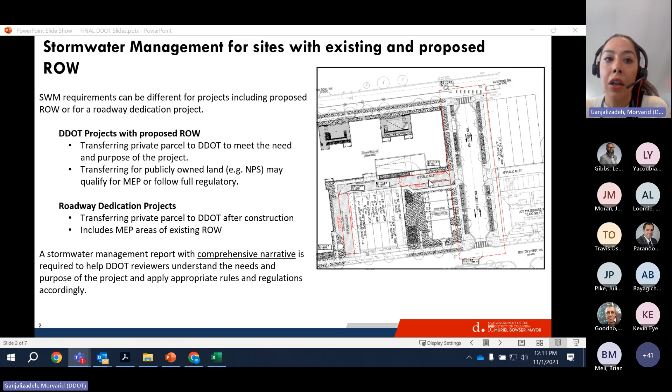Another thing we usually see in our projects that we need to coordinate with the PM or developers on any type of project is applying some of the standards in the bioretentions. Some of these standards have not been updated in our DEM or green infrastructure standards, so we thought it would be good to bring it up in this slide.

The first thing is about the width of the bioretention. Based on recent coordination with the Urban Forestry Division (UFD), we are recommended to have a wider width for the bioretention that includes trees. The minimum requirement for the width of a bioretention based on green infrastructure standards is 4 feet, but if you're proposing a tree, the width should be 5.5 or 6 feet.

So when laying out a bioretention, you may be challenged because in an urban environment we don't have enough space to provide a 6 foot bioretention with a tree. What we recommend is a combination of both: you can have trees at grade and bioretention combined on one street, or propose your bioretention as a curb extension within the parking space to meet the width requirements.

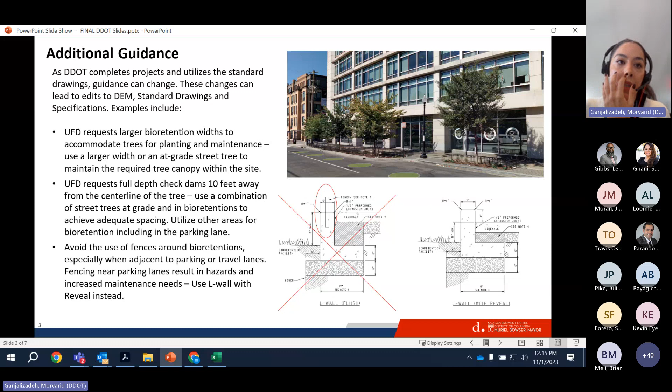There are two more to mention. One is that we are no longer using rock check dams - this is based on the three DDOT green infrastructure standards I mentioned; these two are for other agencies. The first is for DOEE: rock check dams are no longer in use for ponding per DOEE guidelines. You can use other materials such as concrete, plastic, lumber, etc., to achieve your ponding in the bioretention.

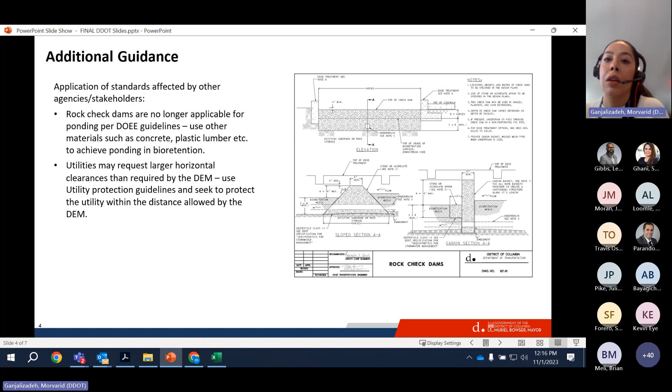We also have our requirements for utilities in the green infrastructure standards, but we recommend following utility protection guidelines from the utility's own guidelines as well, besides DEM and green infrastructure standards. For example, DC Water has its own utility protection guideline for green infrastructure, and we always ask designers to use that as well, specifically for DC Water, not just DEM or GI standards.

Last but not least, two more items: the first is about disturbance. I think that was a common question we had when Travis was presenting as well.

Disturbance, based on the DOEE definition, is the movement of earth, land, or sediment that disturbs the land surface, and the related use of pervious land to support that movement. So I put some examples of what is a disturbance and what is not a disturbance, and comparing these two can help you understand the definition of disturbance.

For example, when you're doing full depth pavement, you are per definition disturbing the land surface and related use of the pervious land, so that's considered a disturbance. If you do any staging or temporary construction entrances on vegetated or natural areas, you are disturbing the land and changing the use of the previous land. If you're proposing a new sidewalk, that's also a disturbance. If you're proposing a median or bump out and disturbing the base, that's considered a disturbance.

What is not a disturbance? Mill and overlay, bridge deck rehabilitation, utility trenching, alley rehabilitation, and medians or bump outs that are not replacing the base. For example, if we're reviewing a construction in DC on private property and they're coming to the right of way only for utility trenching, that is not a disturbance. But if we're doing work in a right of way, for example a capital improvement project, and you're having utility trenching in half of the road, that will be considered a disturbance. So it depends on the nature of the project and where it's happening. DC Water has a lot of utility trenching that is not considered a disturbance.

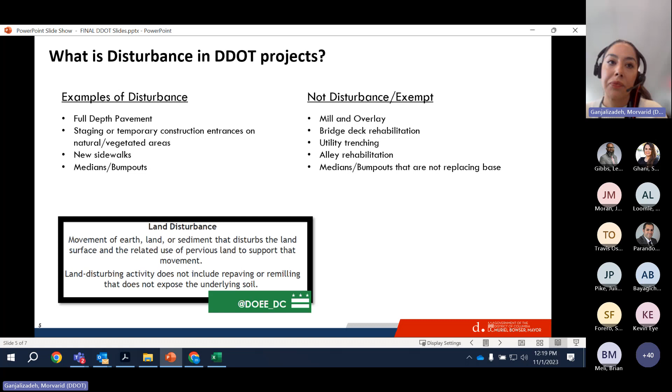Submissions. This is the last topic that I'm going to cover, and then we're going to answer any questions after. So all DDOT projects, including road dedication projects, are required to submit the stormwater management and drainage checklist to DDOT. We provided this stormwater management checklist a couple years ago. It helps us follow the requirements and documents that we need for our review.

I'm emphasizing all DDOT projects, including road dedications and other teams providing documents for us to review, are required to submit the stormwater management checklist. And if you're missing a document, if you're submitting 30% and I'm checking this stormwater checklist and you guys are missing an item, we are returning your submission. We are not moving forward with the review until you submit the completed package.

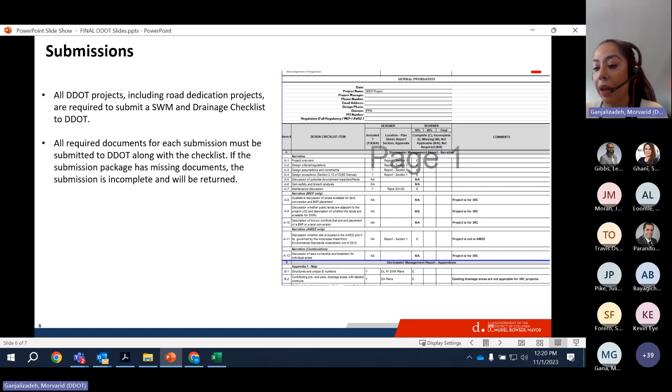Stormwater management and drainage reports. As part of this submission, you need to provide a narrative and your appendices that include calculations and maps. So everything per DEM or your plan sheets should be in scale 20, but drainage area maps should not be submitted in 20 scale. That should be under your maps. The maps provided are separated from proposed plan sheets and show the stormwater management elements.

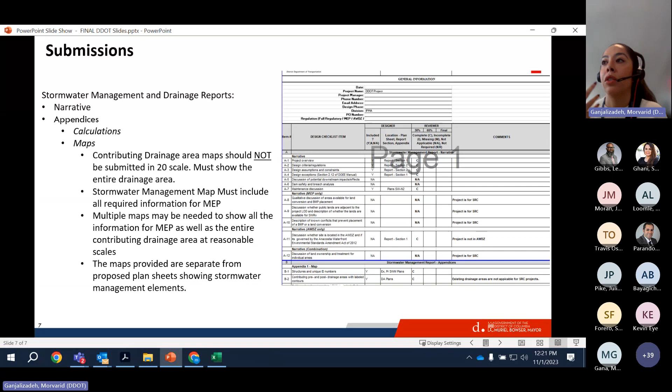Also, the stormwater management map must include all required information for MEP, and it should not be on a scale of 20, but you may need multiple maps to show all the information for MEP as well as the entire contributing drainage area at a reasonable scale. So we don't need to see the drainage area map in 10 sheets. It can be in a different scale, not just one sheet. You can have it in 2 or 3, but you don't need to submit it in a 20 scale. I think I covered everything.

We still have 10 more minutes, so if you guys have any questions, I can answer them.

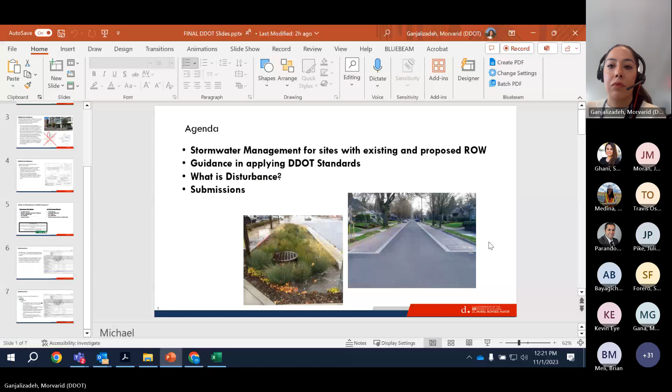Can I add one clarification on the disturbance for utility trenching? Yes, sure, let me share my screen. Utility trenching is considered disturbance for the erosion sediment control plan. So whenever you're submitting to DOEE, you are required to provide an erosion sediment control plan for the disturbance due to utility trenching, but it is exempt from the stormwater management requirement.

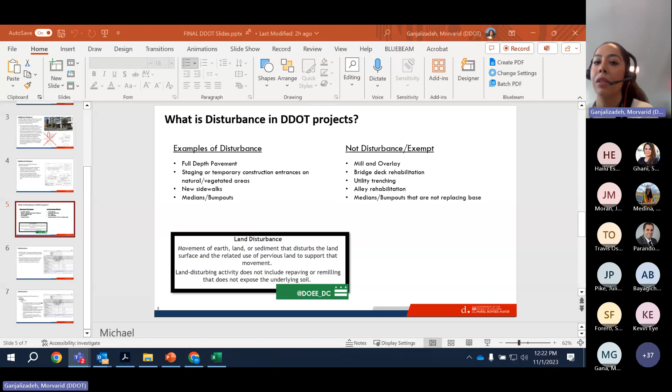Julie, you were asked about the copy of the checklist. Yes, we can send a copy of the DDOT checklist, the same as the other document that I emailed. I can email the checklist too, and we can send that at the end of the training. This is something we've been providing at 30% or 65%, and we try to provide it even at kickoff for design plans for DDOT projects. So that's something to look out for, because if we update the checklist, getting it at the beginning of your design project will make sure you have the most correct version of it.

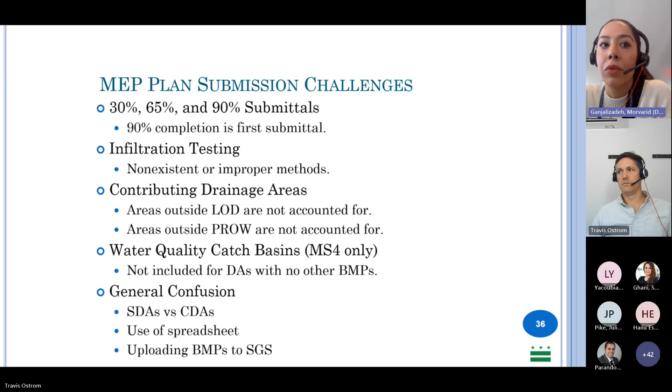There are so many cases that DOEE approved. We're trying to be parallel and coordinate, but sometimes DOEE approves and then we have comments, and the consultants or other PMs think that they have to go back to DOEE and resubmit it to the database. Make sure that when you're submitting for DDOT review, you also at the same time submit to the DOEE so we can have a parallel review with each other, so you don't stamp and then go back and resubmit after DOEE approval.

One more question. So no fences around bioretention planters or any BMPs. Isn't there a safety issue, risk of a person stepping down, or is there? So when we do the flush design, I can share my screen.

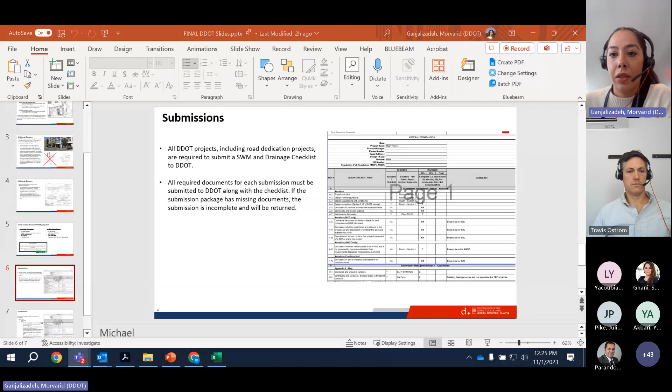Yeah, I added to that. There is a curb that's always required. There will be some instances where we do see the fence, but we have just found that it is a big maintenance issue. They often get hit, and they often then end up being hazards to pedestrians and other folks. So we do not want to see fences anywhere close to where a car would be, so not adjacent to travel lanes, not adjacent to parking lanes.

And they are used only with specific conditions, so that would be the exception. Generally, we want to see the L-wall with reveal, which is on the right. That 4 inches is for the safety, instead of having it flush and then the fence.

And that fence is only 18 inches high. These are for facilities that have an 18-inch drop. And if there is a larger drop, if you look at our design and engineering manual, it will talk about a much higher fence if there's a significant drop-off between the sidewalk elevation and the bioretention.

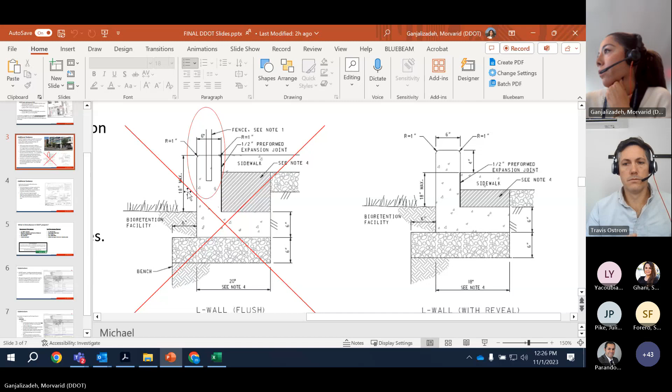Okay. I don't think there's any more questions. That's good, we were on time. Travis, do you want to wrap it up?